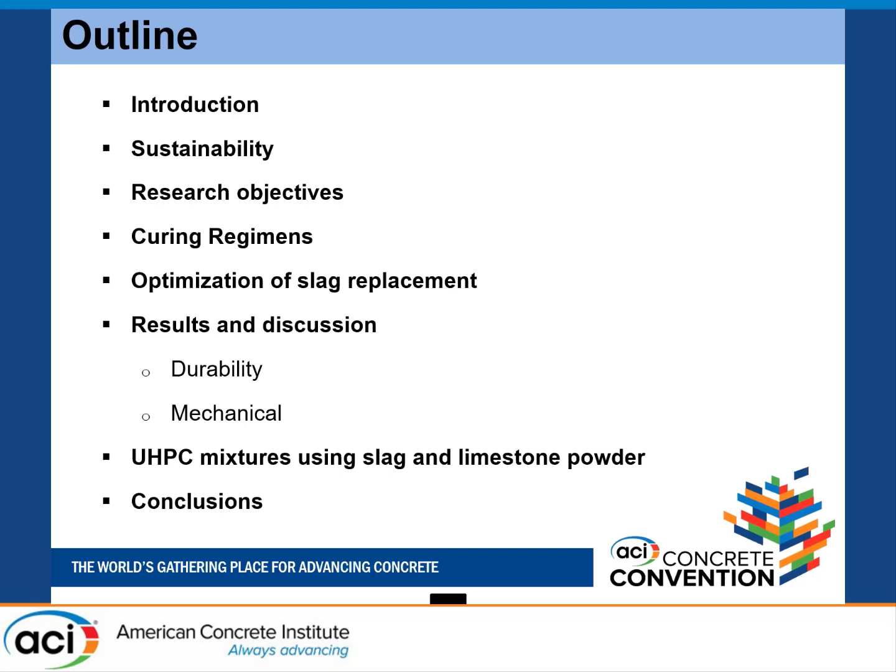This is the outline of my presentation. I'll talk a little bit about sustainability, research objectives, and the various curing regimens we used to develop this material, and how we replace cement with slag up to 60%. Then I'll talk about a little bit of results on durability and mechanical performance that we observed in the laboratory experimentation.

But it's a very high density concrete, very less porous. The permeable porosity we measured in the lab is way less than 2%. Even then, those pores are not interconnected, so ingress of harmful ions like chlorides and sulfates is nil. Freeze-thaw durability is excellent. This is the material for the future.

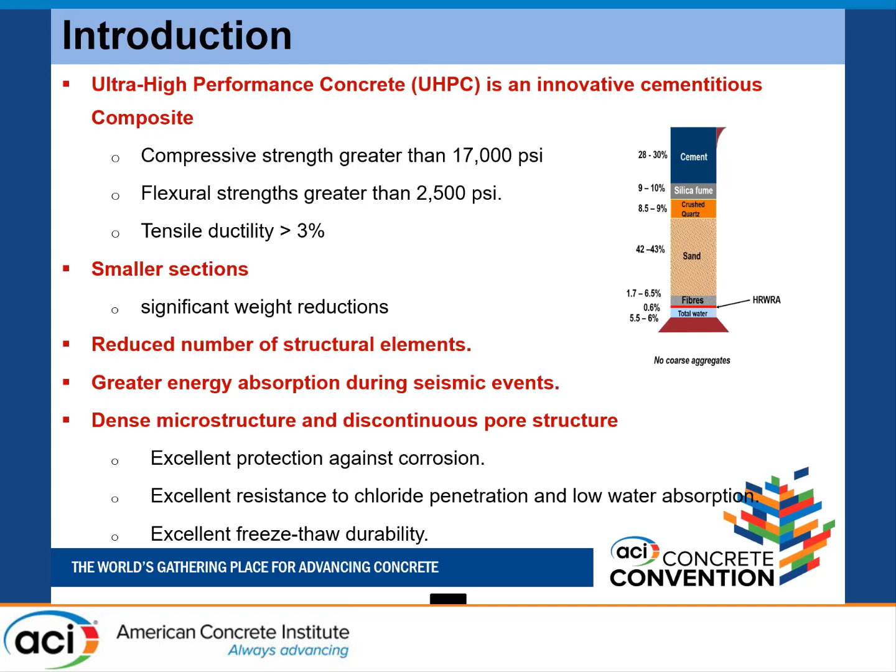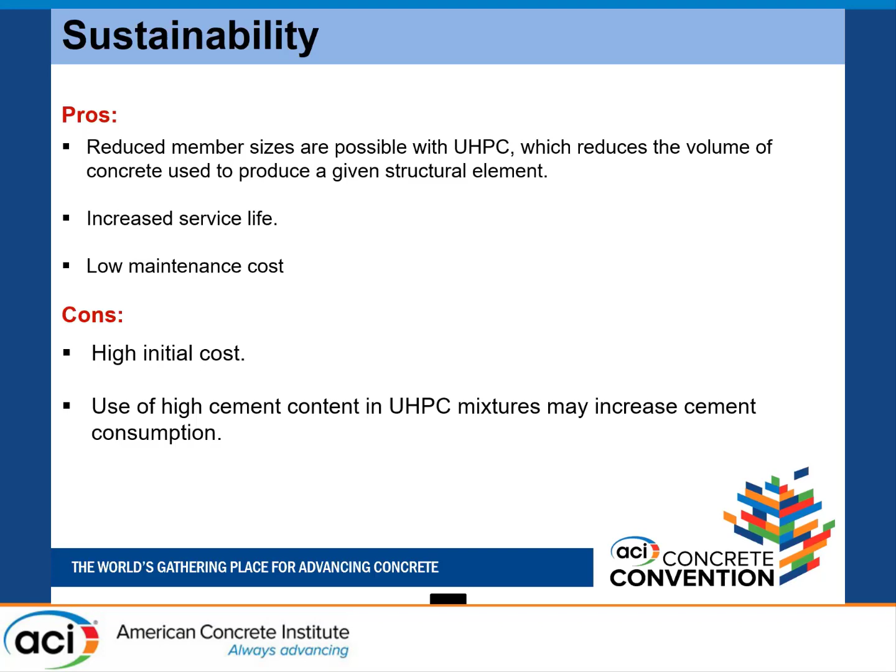Of course, I already talked about advantages and disadvantages. The main thing is high initial cost. All the researchers working on this ultra high performance concrete are basically working towards the reduction of the cost. High cement content is another issue, especially from the environmental sustainability point of view. And for this particular material, some of the raw materials such as silica fume and steel fibers are being shipped from abroad. Sometimes they have to be imported.

Until very recently, we had to get the steel fibers from China, but after the Buy America law, using steel fibers from other countries was restricted. Even federal government projects have to get approval for a project waiver to get the steel fibers from China and other countries. But we have one or two companies available now producing steel fibers here. That is another challenge. My next step of research is how to eliminate steel fibers by using some crumb rubber particles, because both are toughening materials.

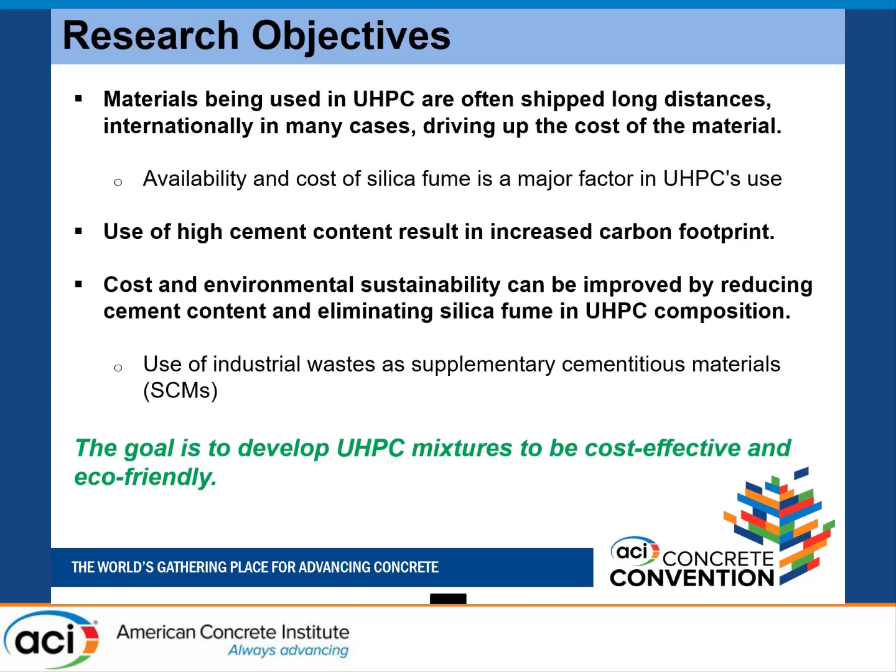Another thing is, in some states, we were surprised that they want to use ultra high performance concrete. For example, the Illinois Department of Transportation wants to use UHPC for their bridge applications, but unfortunately, they do not have access or a supply of silica fume. So that is another drawback. In all our research, we have identified all these practical problems, and we are now working towards solving them. The goal of this research is to develop an ultra high performance concrete that is cost effective and environmentally friendly.

Now, as an alternative to cement, we have two choices: fly ash and blast furnace slag. Several researchers are using fly ash, so we should rethink why we cannot use blast furnace slag. At the same time, for the Slag Cement Association and other slag users, this is a great opportunity because fly ash is slowly disappearing. That is another challenge the entire construction industry has to face now. So we are also working on finding alternatives to fly ash.

One of my research students, Meghana, is here. She's one of the team members. She is investigating alternative pozzolans to replace fly ash. And now we are using slag to replace cement.

Now Meghana is trying to replace fly ash with slag in her mixes that are being used for bridge deck overlays. So we'll see how it goes for next year.

So the blast furnace slag is basically, we all know, a byproduct from steel mills. It's a very useful supplementary cementitious material. It helps reduce the porosity of the concrete and provides greater later age strength. Obviously, since we are replacing cement with it, it helps in reducing the carbon footprint of the construction industry.

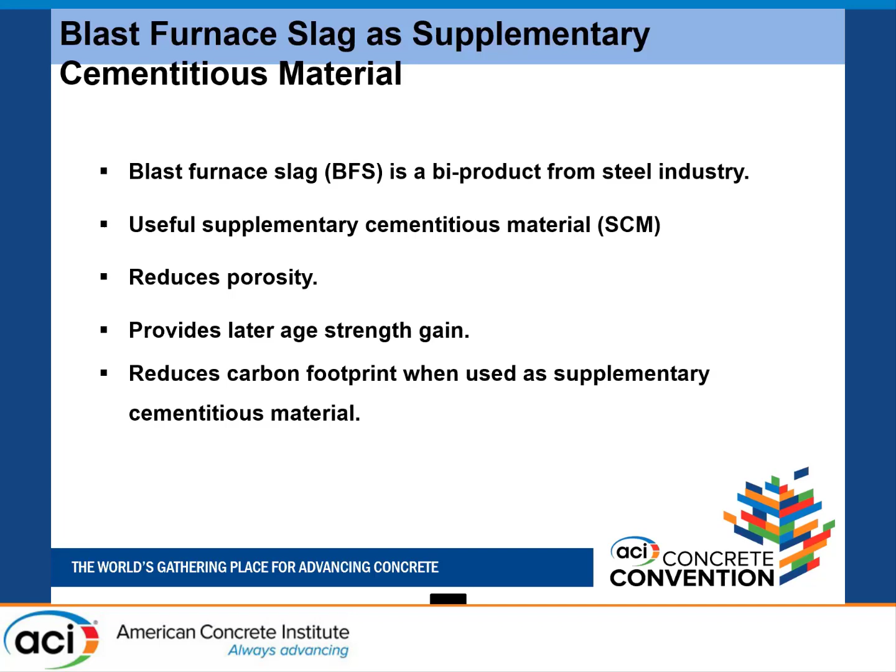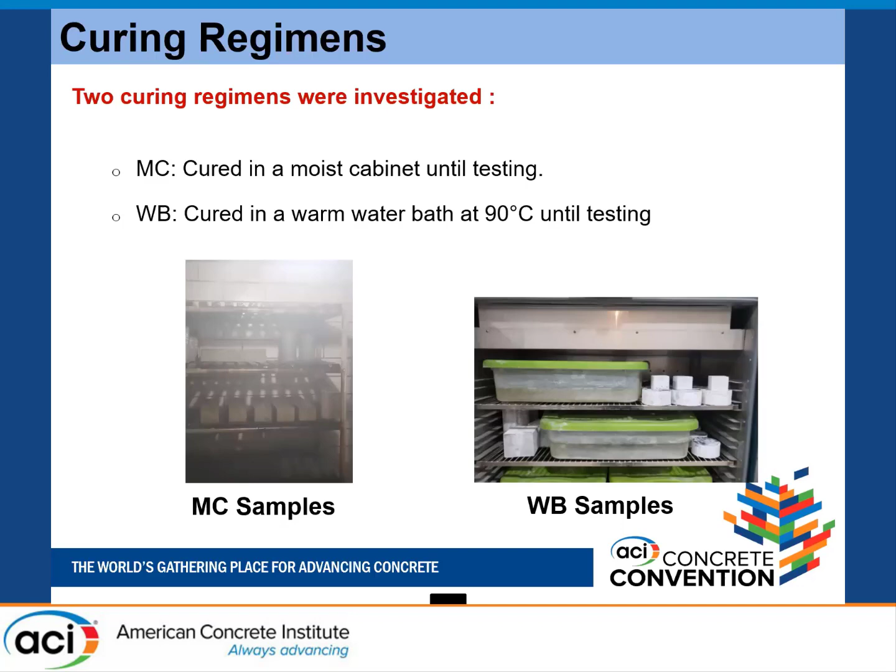Now, in this particular research, we have used two different curing regimens to investigate the effect of heat treatment, how the slag stabilizes the cementitious system under elevated temperatures. The regular one is just a moist curing room at room temperature and almost 85 percent relative humidity. And water bath curing basically simulates the steam curing in precast plants. So what we did is we took a plastic tub with water and placed it in an oven, set that oven at 90 degrees Celsius, and all the specimens were cured in a wet curing condition, but at 90 degrees Celsius to simulate the steam curing. These are the two curing regimens that we investigated.

Then, the first step in this research is to optimize the slag content. How much slag can we now use to replace cement? For that, we tested 2-inch cubes for compressive strength at 7 days, and we replaced cement with slag at various replacement levels up to 75%. The target compressive strength that we kept in mind is 17,000 psi. Any material can be defined as a UHPC class material if it exhibits a compressive strength of greater than 17,000 psi. So if you look at it, for any replacement level, we achieved strengths of 17,000 and above at 7 days.

But we have chosen 60% replacement level because it exhibited 17,000 psi, while anything above 60% we have seen workability issues. We even tried 100% cement replacement too, but workability became a very complex issue. We could not get workability even after adding 10 gallons per cubic yard of high range water reducing admixture. So we thought 60% is a perfect replacement for cement in UHPC systems.

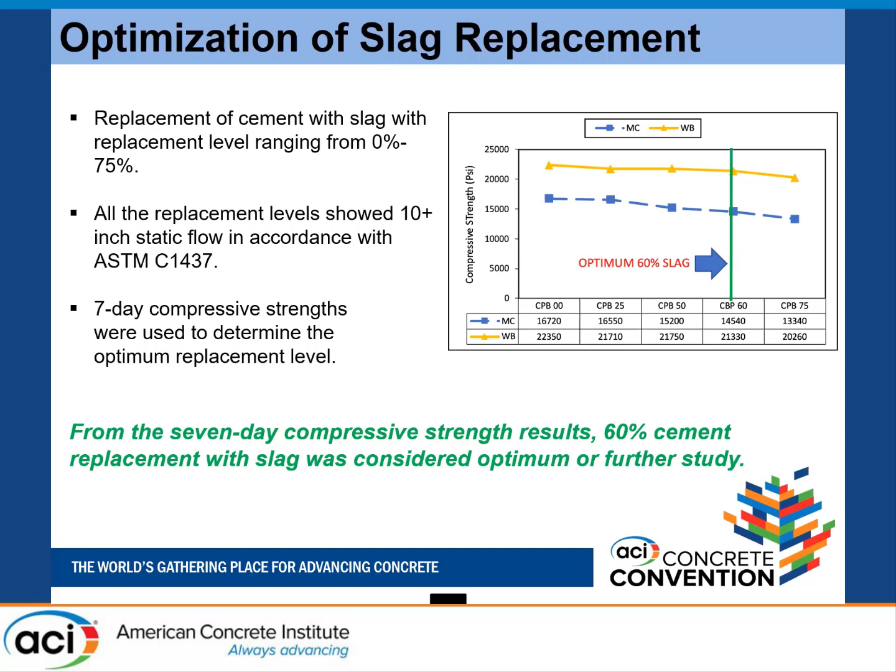So another PhD student worked on this. From thorough experimentation, we concluded that using fine sand is not at all a requirement in achieving UHPC characteristics. Number 4 stockpile sand is just enough. Therefore, in this particular research, we have not used any fine sand, but just stockpile sand. The 4 stands for number 4 sand. So P is plain, A is series A, and 4 is number 4 sand. PB4 means plain, series B, number 4 sand. FB4 means fiber reinforced UHPC, series B, number 4 sand.

The basic difference between series A and series B is that series A is with no slag, series B is with slag. In series B, we have used just 600 pounds per cubic yard of cement. That is just a conventional concrete level of cement dosage. The cement factor is very, very low. And 900 pounds per cubic yard of slag we used. So 40% cement, 60% slag in a UHPC system. And in all of these 4 mixes, with slag and without slag, the flow on a spread table is greater than 10 inches, which is way more than enough for bridge applications.

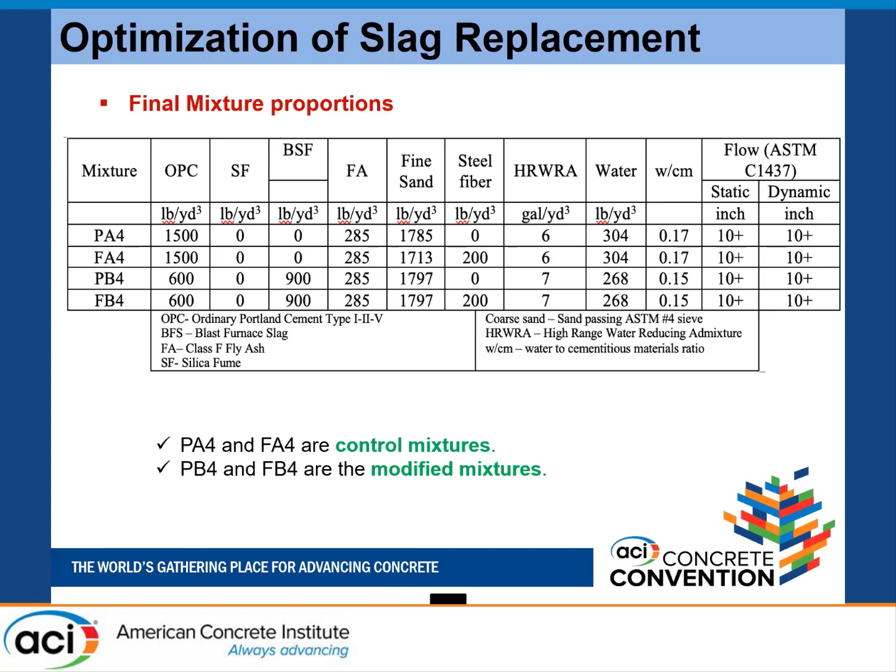Then the permeable porosity we measured. If you look at it, the porosity is drastically reduced using slag. In the control mixes, where there is no slag, the permeable porosity of UHPC is 2.4%, while in the slag mixes, the B series mixes, the permeable porosity is just 1.1%. That means the presence of slag reduced the permeable porosity by 50%, which is a great thing for any concrete, basically.

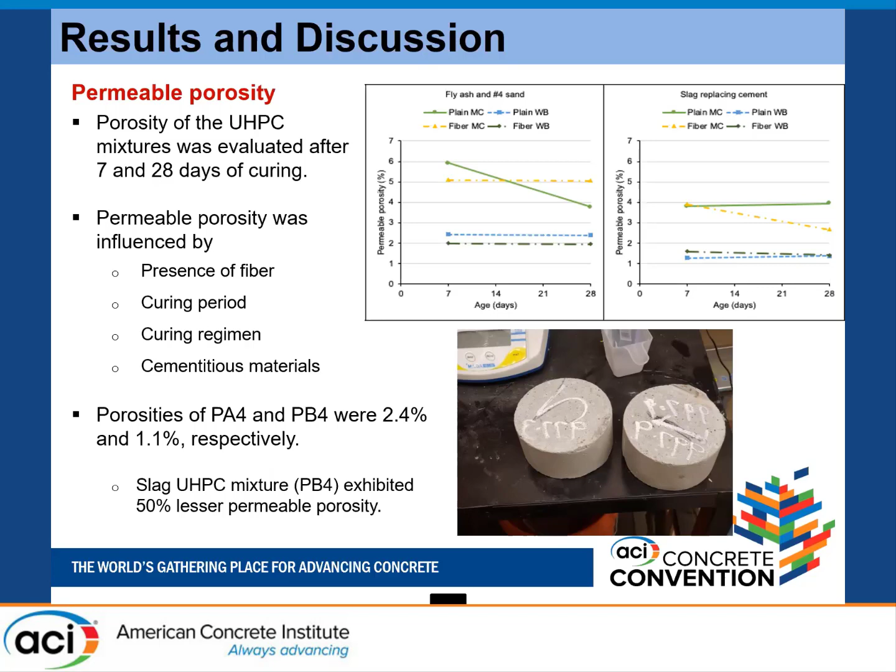Primarily, the presence of fibers, curing period, type of curing regimen, and cementitious materials are the main factors that can influence the porosity. For both these systems, the fibers are constant at 2% by volume. Curing period is the same. Type of curing regimen is the same. But the slag mixes exhibited 50% lower porosity, which is nothing but the filler effect of the slag that helped the reduction of porosity. This is one benefit we have observed.

And compressive strengths, if you look at it, the control mixes had average compressive strengths of 24,000 psi for plain and 25,000 psi for fiber. But the slag mixes produced slightly lower strengths, 19,000, about 20,000 psi with plain mixes and more or less similar strengths for the fiber reinforced mixes. Obviously, this is understandable. Nevertheless, with the penalty in compressive strength, we saved a lot of cement and cost. And 17,000 psi is strong enough to apply in bridge applications. But we are still working on improving these strengths. Later I will show you that we finally hit the 24,000 mark even with slag in the next few slides.

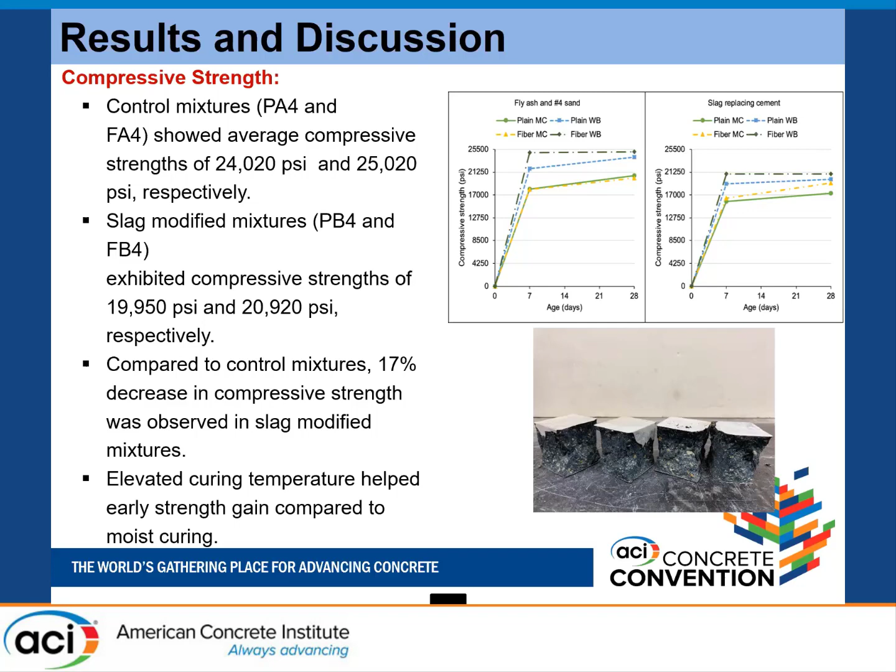After the next few slides, you will see that the 17% decrease in compressive strength we observed, we were later able to recover by doing something else. So elevated curing temperatures definitely helped early strength gain even with the slag mixes. Those are some of the broken samples you can see.

And split tensile strengths are also more or less similar for both the control mixes, A series, and B series slag mixes, 2200 psi split tensile strength for this ultra high performance concrete as opposed to 600 to 700 psi in conventional concrete.

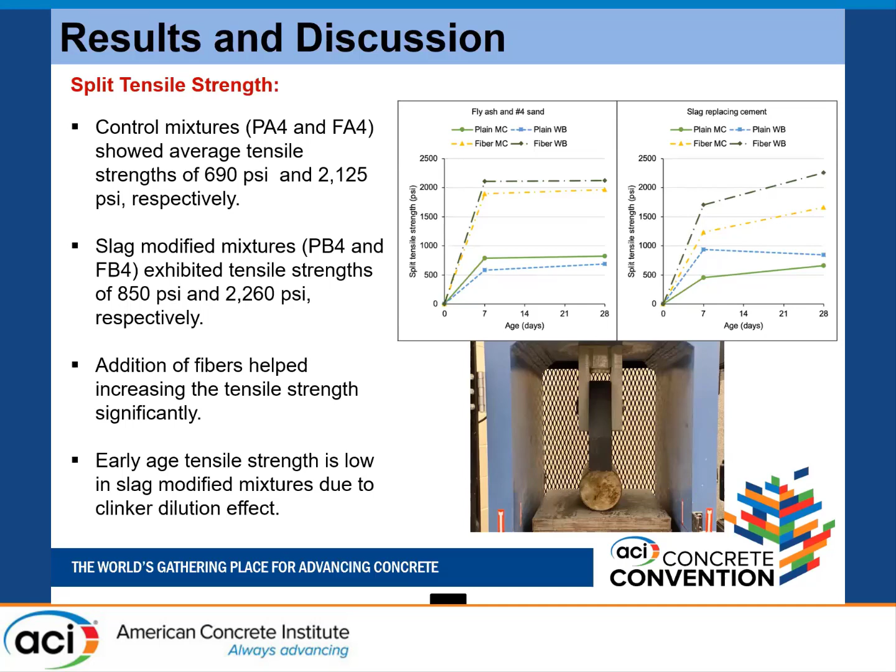And the rapid chloride permeability test we performed to observe the susceptibility to chloride ion penetration. If you look at it, the blue bars are with moist curing, and the orange bars are with water bath curing. Obviously, water bath curing at elevated temperatures accelerates the early action of pozzolanic material. The early hydration of this pozzolanic material, slag, basically produces secondary calcium silicate hydrates that fill the voids left from the primary hydration of cement, so that enhances the microstructure.

So obviously the pore spaces and pore volumes have been reduced. Therefore, the chloride ingress is reduced. So in both non-slag mixes and slag mixes, we observed very low to negligible chloride ion susceptibility.

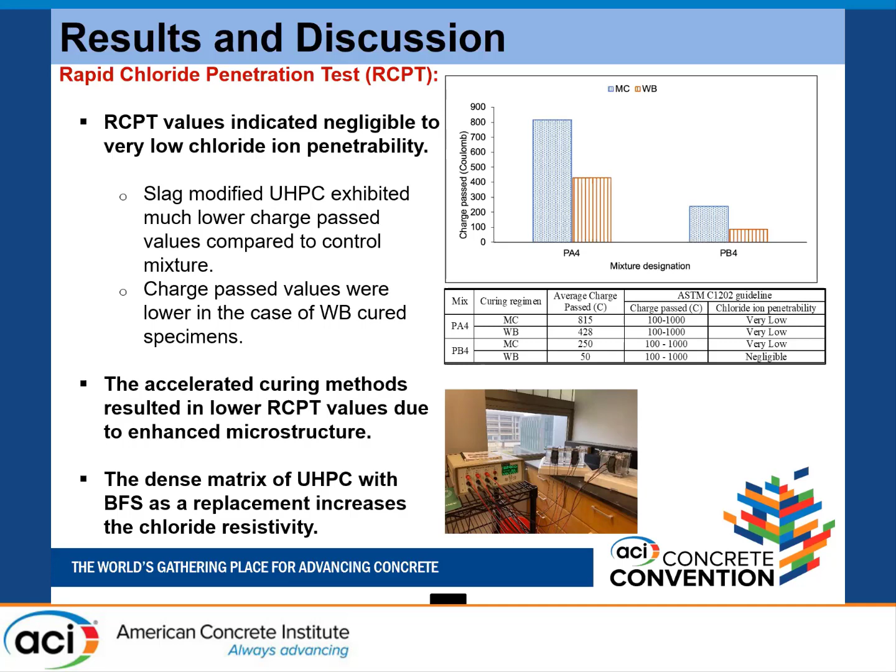And then we did some freeze-thaw testing. Below are the freeze-thaw cycles that we followed. But in freeze-thaw, we used slightly different curing regimes. The standard ASTM C666 Method A suggests 14-day moist curing and then 1-day conditioning before putting the samples into the freeze-thaw cabinet, which we followed.

And then we tried to simulate practical conditions, with only 7-day moist curing followed by 7-day dry curing, because no one in the field will cure the specimens for 14 days, such a long time. It is practically not possible. Therefore, to simulate practical conditions, we did a brief 7-day moist curing, and then we just left the specimens in air to see the freeze-thaw resistance of these UHPC specimens.

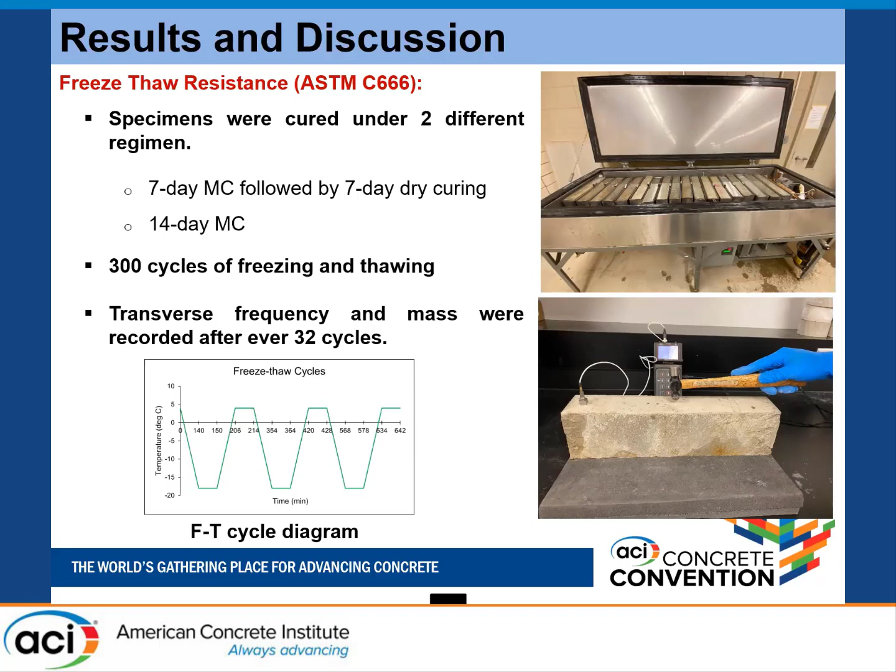These two graphs are basically mass versus number of cycles on the left, and relative dynamic modulus on the right, and these graphs are related to A series mixes, non-slag mixes. There is no mass reduction. That means there is no micro crack formation, no material distress inside. That's an indication.

And relative dynamic modulus never falls below 100%. For conventional concrete, for your information, if the relative dynamic modulus of any specimen falls below 60%, we classify that specimen as failed under freeze-thaw conditions. But ASTM C1856, related to UHPC material, requires the relative dynamic modulus not to fall below 90%, because it's a high integrity material. So it's not 60% as the threshold number, it is 90%. But in this case, we have seen there is no drop in relative dynamic modulus.

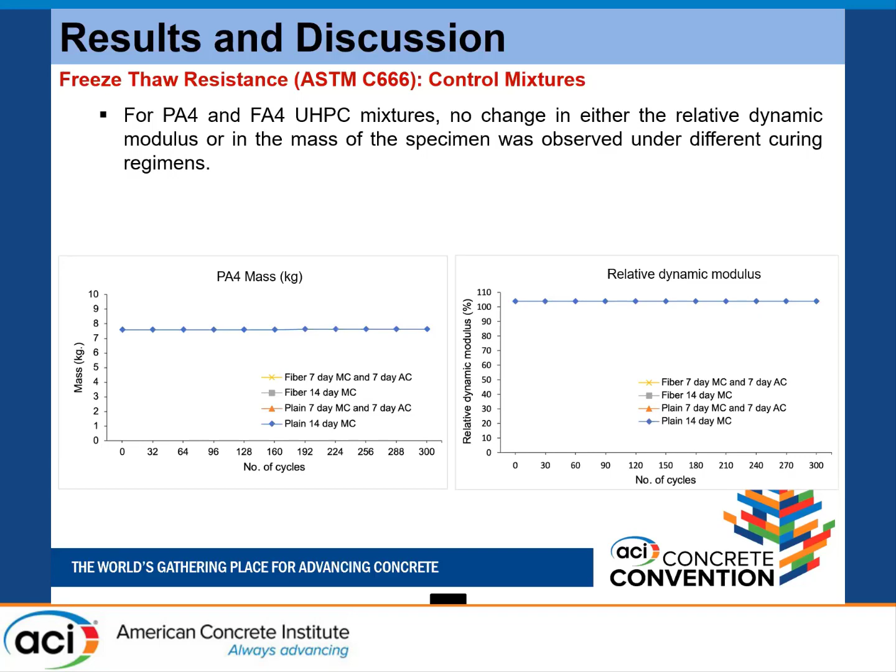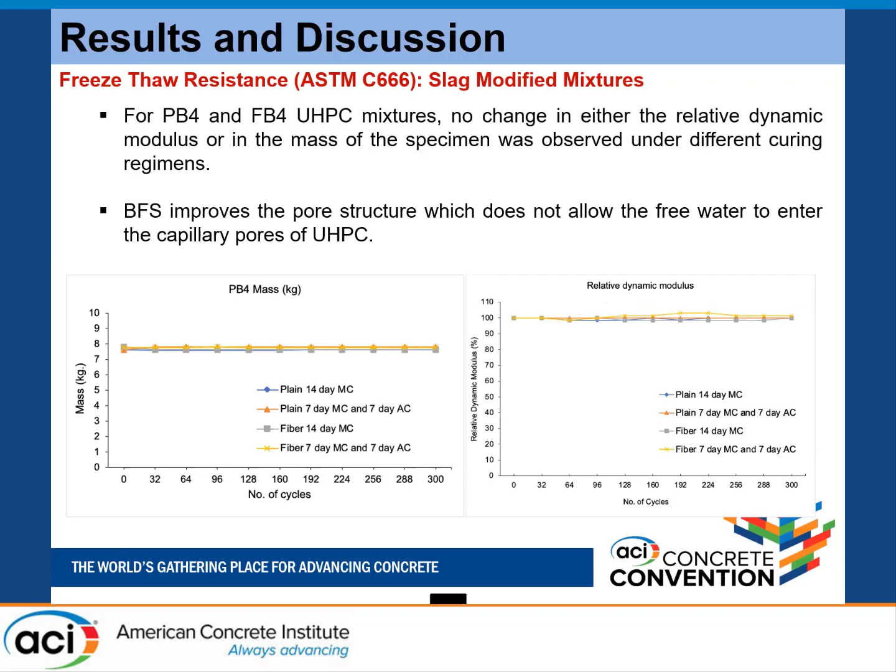This part of the research is still ongoing, and we have successfully replaced cement with slag by 60%. Currently, a lot of State Departments of Transportation are leaning towards using PLCs, especially the Ohio Department of Transportation. We are hearing from various sectors of industry that the Ohio Department of Transportation will be switching to PLCs from next year. So we have to see how slag will react with limestone, because we have to get ready for the practical conditions that can occur anytime in the future.

Right now we are only looking at the interaction of slag and cement, but now we have to see the interaction of slag with limestone cement. That's an important point. That's why we caught the point and included it in our research. Instead of using PLC, we are using a dolomite-based limestone powder, plentifully available, which is a byproduct and waste material from the crushing of limestone aggregates. So now the limestone basically acts as a mineral filler. It is not a supplementary cementitious material. We can call it a supplementary material as a mineral filler.

Especially in UHPC systems, we are using about 1500 pounds per cubic yard of cementitious material with a very low water-cement ratio of 0.15. And typically we need 28% of water for completing the hydration. We are 13% less than what we require. Therefore, not much hydration can go on as in conventional concrete. A lot of unused cementitious binders will be left and they will be acting as filler rather than binding material.

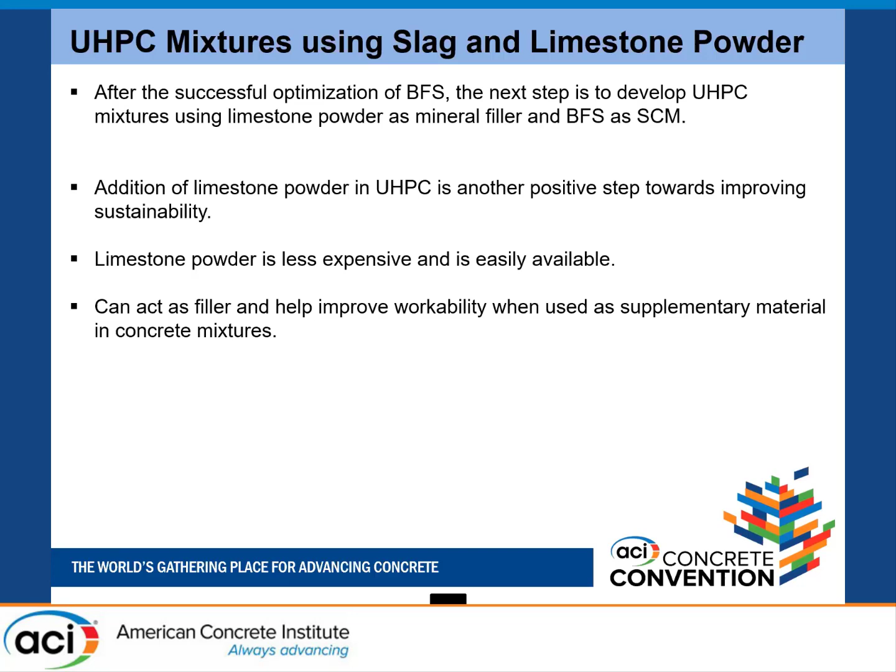Why should we waste supplementary cementitious materials like cement, slag, or fly ash just to use them as fillers? We can take out that portion and use a filler like limestone powder, which is cheap. Right? So therefore, we are now trying to replace cement with limestone.

The 1 and 1A series: 1 has cement, slag, fly ash, and silica fume. In 1A, everything is the same, but with silica fume of 6% of total cementitious binders. So 63% cement, 21% slag out of the total cementitious binder. Fly ash is 16%, no silica fume. The only difference in 1A is 6% silica fume, to see how it goes with limestone, because we are eliminating cement further by limestone. So we need to have a little bit of silica fume here.

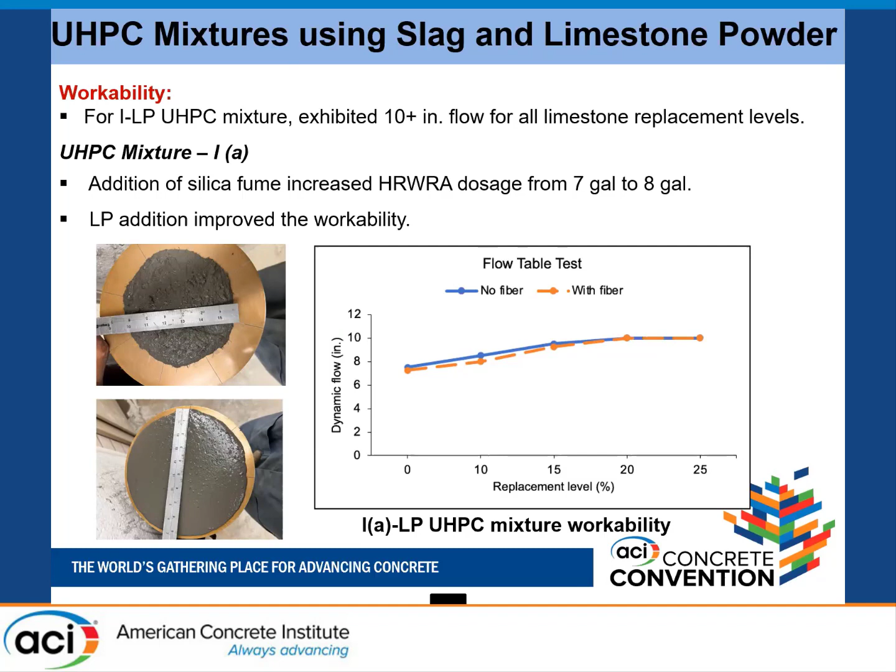If you look at it, there are spreads all over with these mixes. I'm presenting the 1A mix here with 6% silica fume. We have achieved more than 10 inches of spread with 7 to 8 gallons of high range water reducing admixture. So flow is fine, and we are achieving strengths of 20,790 psi for the plain 1A mixture with 6% silica fume. And when we introduce fibers, the compressive strength increased to about 22,000 psi.

We have observed no significant strength decrease with the increase in limestone powder content. We varied the limestone powder content from 0 to 25% replacement of cement, only cement. But we have not seen a significant strength decrease. That means limestone powder is interacting properly as a mineral filler in the presence of slag. It's a preliminary investigation, just to present what we are doing. It's ongoing work, and a lot of work is still pending.

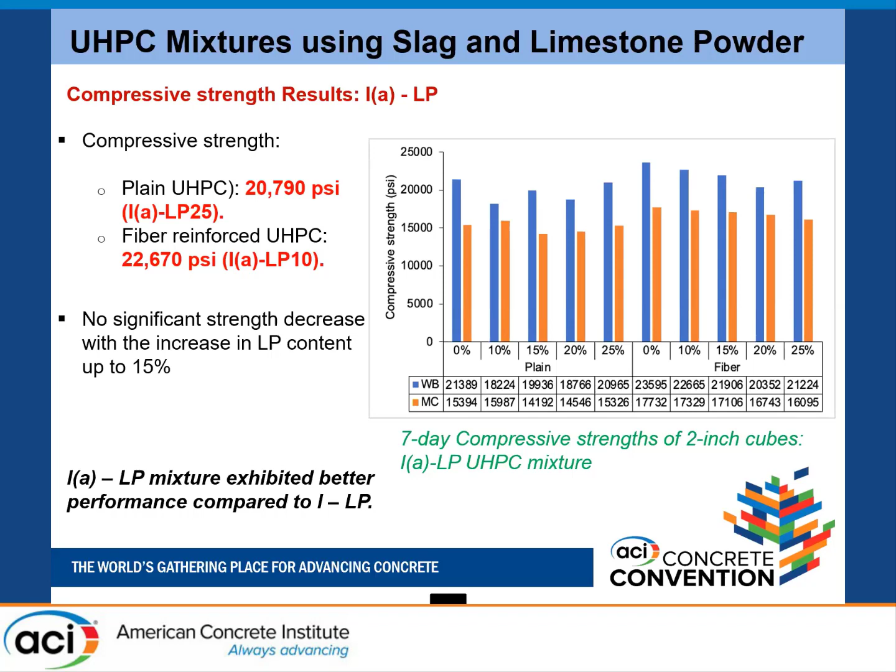And if you look at it, the compressive strengths of plain UHPC and fiber UHPC here are 20,000, 22,000. We got increased compressive strengths here, but we have seen no strength decrease with the LP cement combination with slag. And here the limestone powder is replacing cement by 15%.

Even though in this mix design slag is showing 21% of the total binder content, if you count only in terms of cement, here slag is replacing cement by 25% and 15% of limestone. So with the limestone combination, we are actually replacing 40% of cement. If you want to use limestone powder, as of now, slag can replace cement 25%.

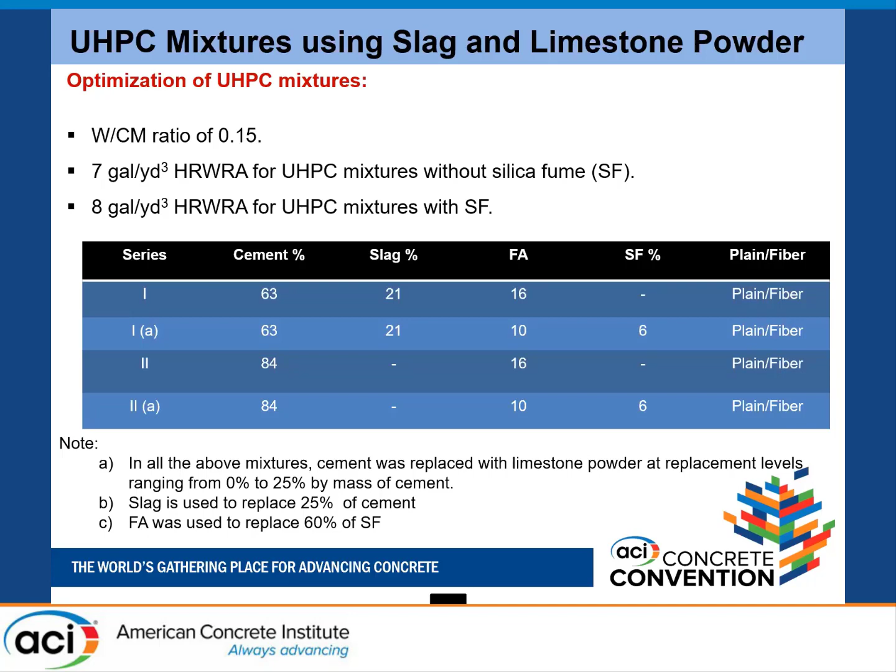And because we want to go up to the maximum potential of limestone powder. If you want to reduce the limestone powder to like 10%, then slag can be 35%. It's a combination, right? But nevertheless, the total cementitious content to cement can be replaced 40% together with slag in combination with limestone. That is our primary observation.

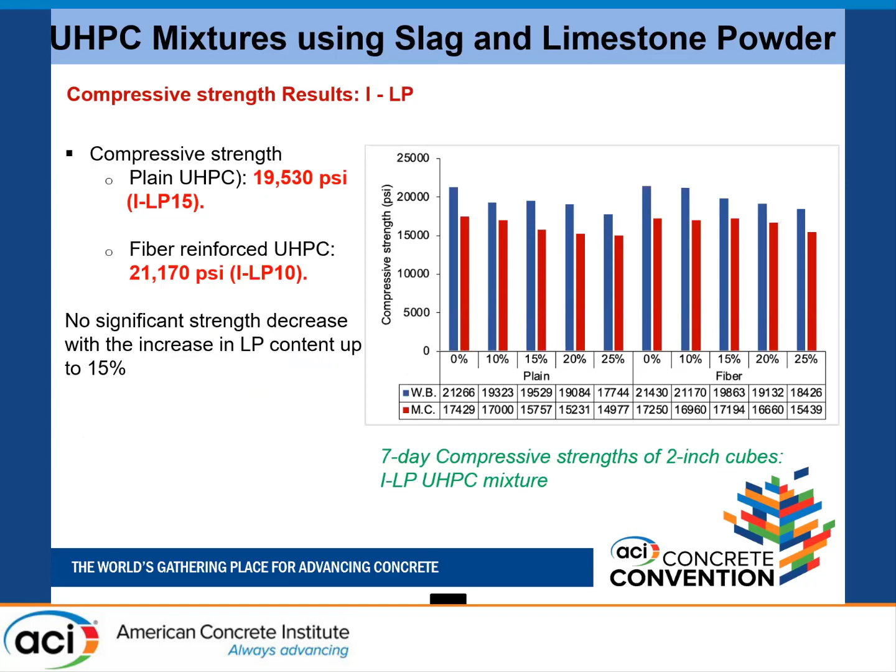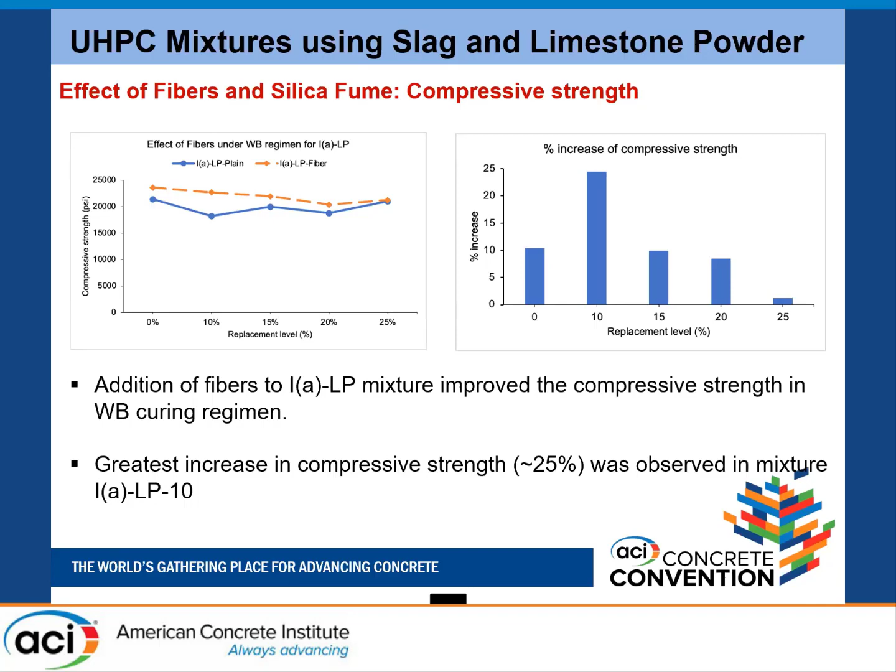And then there are some effects of steel fibers and silica fume here, with various replacement levels of limestone powder. Obviously, if you look at the graph on the left side, the fiber reinforced UHPC orange bar is producing greater compressive strengths when compared to plain. And the percentage increase in compressive strength is shown along with silica presence with replacement level. If you see, the greatest compressive strength we achieved at the 10% replacement level of limestone powder when compared to others, but still 15% is a viable option because we are able to produce more than 17,000 psi compressive strengths.

where they will be using 1,500 pounds of cement and other cost expensive materials such as quartz powder, sometimes applying presetting pressures, and expensive facilities may be needed, but this is UHPC. This UHPC can be produced with your local materials. It can be mixed on your job sites. You can easily train your workforce for your bridge applications or construction applications to make use of great benefits of this particular product.

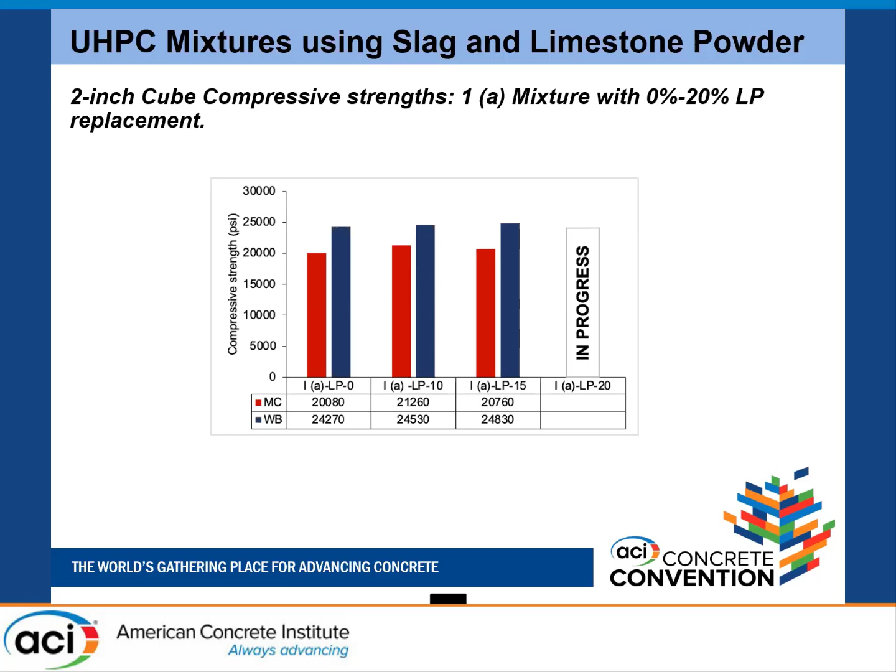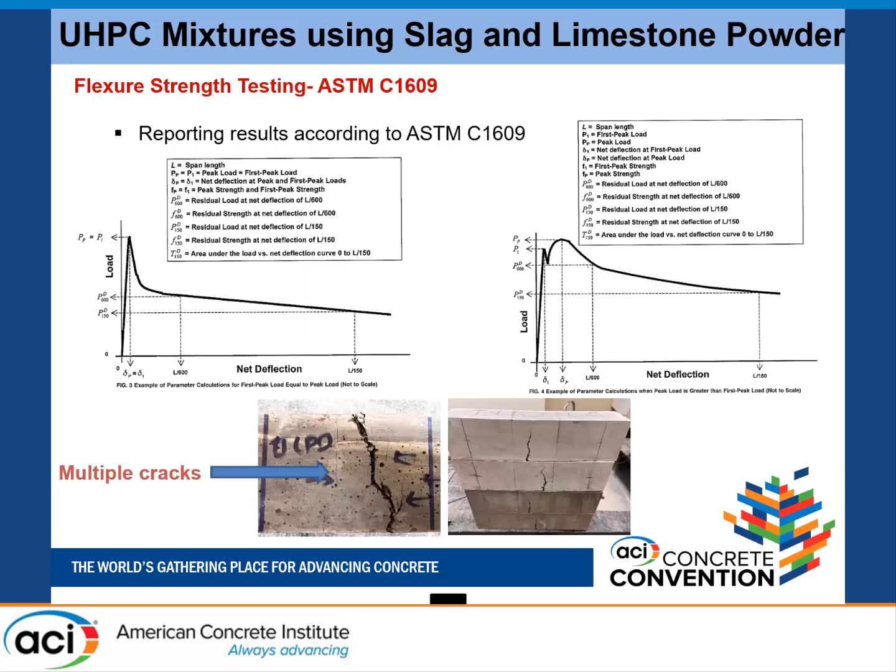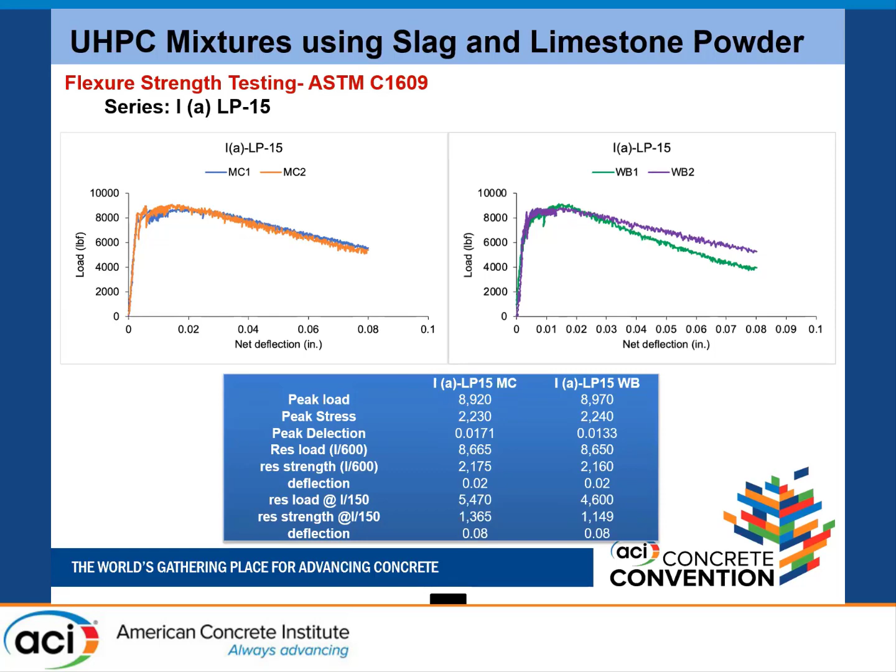And then finally, cement can be safely replaced with slag in UHPC systems up to 60%. And if you want to use slag in combination with limestone powder, 25% slag, and you can use limestone powder up to 20%. And this combination actually improves the density of the concrete too, resulting in very low permeable porosity and very high resistance to chloride resistivity, we observed.

Quaternary blended mixes can be produced like cement, silica fume, slag, and limestone powder. That's the best combination we're thinking, and we have to move forward. And durability is not at all adversely affected by the use of slag in combination with limestone. And the final UHPC product with a quaternary blend or tertiary blend is a cost-effective and environmentally friendly UHPC that can be produced with your locally available materials and can be widely used in your structural applications.